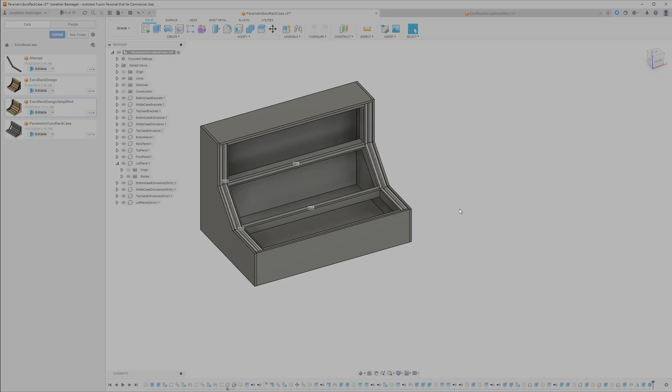So basically, let me show you how this works. Obviously I'm in Fusion 360. I'm not a master or anything at Fusion, I'm actually pretty new to it, but it was a fairly simple design, so it wasn't too bad. But I'll go through how this works.

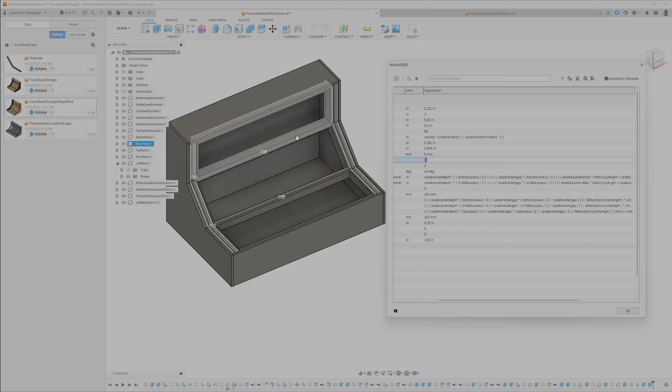So we've got a ton of different parameters here. It's kind of the most common thing you'll see is, okay, how many U's do you want on each section of the case? It's split into three sections - you've got the bottom, middle, and top. So you can customize each of those sections to your liking.

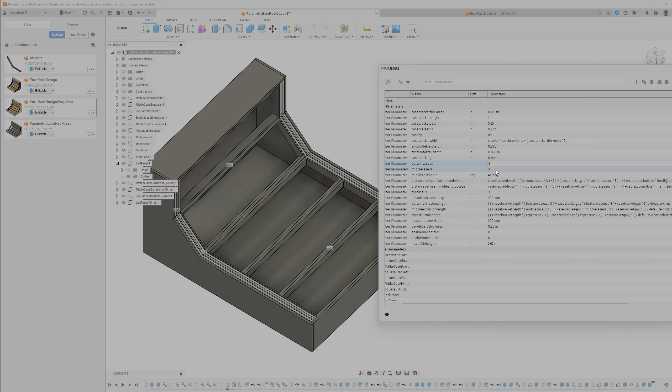For example, I can come here and change the bottom to, let's say, 9U, if it lets me. There we go, 9U, and you'll see now the bottom is 9U. These are still tiny, this looks weird, but yeah, you could do it if you totally want to. Let's do, for my case, I'm probably just going to go 6 on all of the sections.

So something like this. And then you can come in here and change your HP. I'm just going to make something up, let's say 200 HP, and you've got a really wide case there.

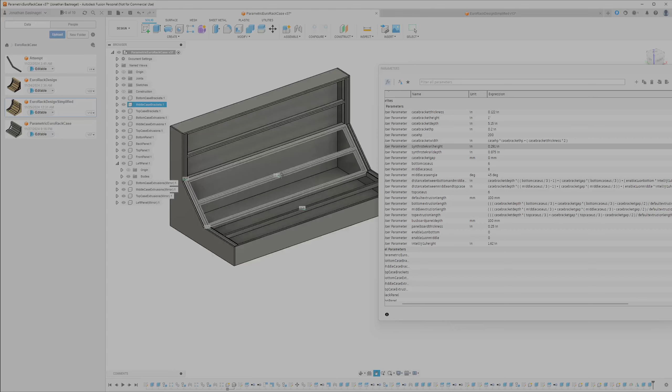You can also change things like - one of the requested things was having a gap between these brackets, for two, actually I guess three, different reasons. One was being able to route wires permanently, so people wanted to be able to route wires and hide them behind, then connect them in a permanent way, and keep those out of the way. The other was cooling.

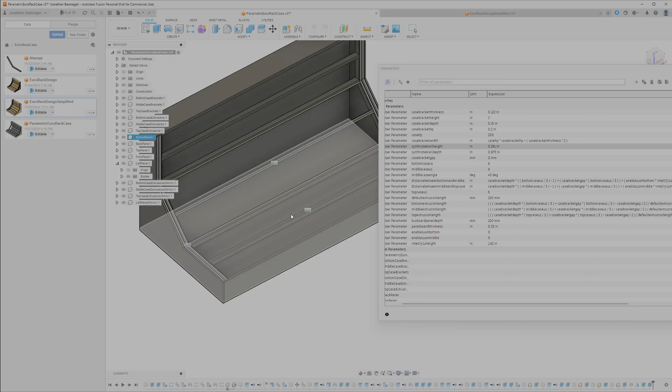To let air naturally flow, so it's not all the modules just cooking behind there. The third reason was someone mentioned that at these 45-degree angles it's kind of hard to connect between modules, so adding a gap there can help. So you can actually change the gap, so to speak - I call it a case bracket gap. If I do 10 mil here, you'll see there's 10 mil between each of them.

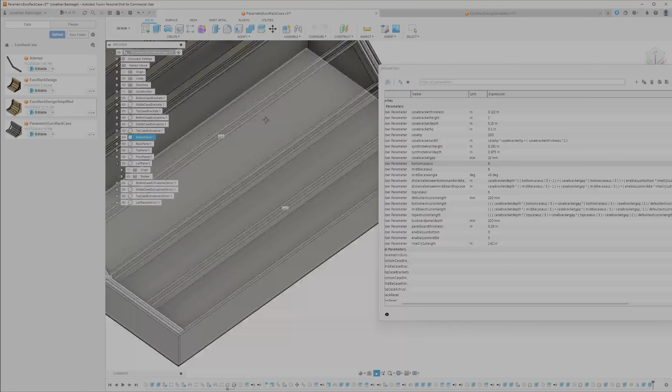Pretty cool. Then another thing you can do is change the depth between basically the top and the bottom. You can think of the top as just like where your modules would mount to. So from here to down here is 100 mil right now, and that's customizable. If you want a deeper case, you can say, hey, I want 200 millimeters. Oh well, maybe that's too high.

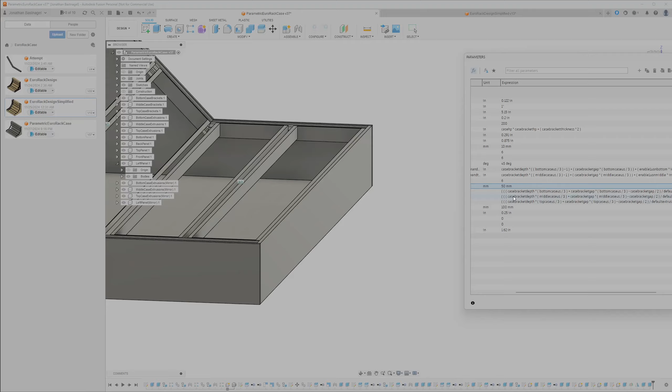I gotta fix that. But yeah, you can change this - let's actually make it smaller, right, 50 mil. Oh, I broke it. Did I break it? I think I broke it. Oh wait, I changed the wrong thing - oh, that's the extrusion length. Sorry, wrong thing, that'll break things.

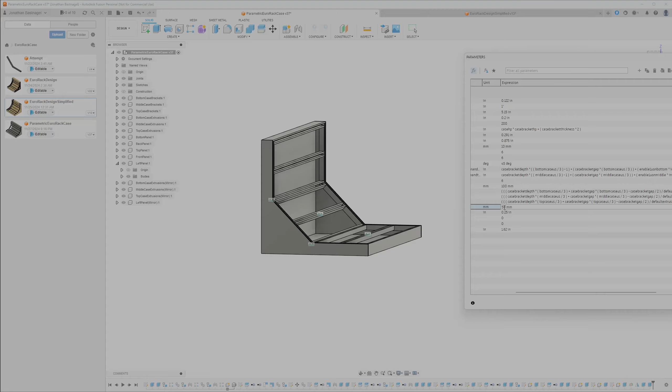Yeah, so if I do 50 mil here, you'll see it gets shallower. If I do 200 mil, it gets real deep. So yeah, you can do whatever you want there. And I'm going to have a false bottom here - it's just not modeled right now, it's still something I need to work on. But the false bottom will also have the same depth, and that's just so that all the...

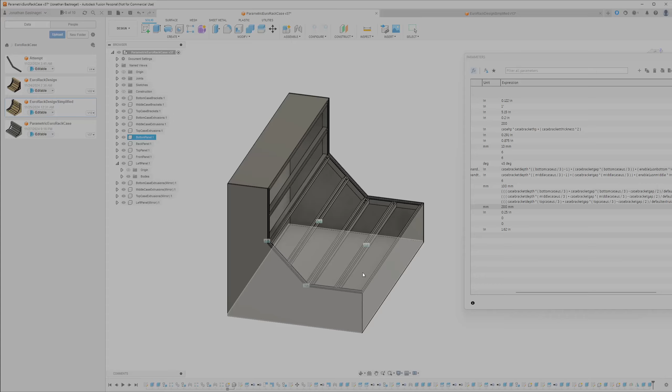Damn it, what are they called? Power boards, I forget the name of them, I don't know, I'm drawing a blank. Anyways, between all of these cases, they'll have 100 mil, or whatever you define, as your bus board. It's right there, yeah.

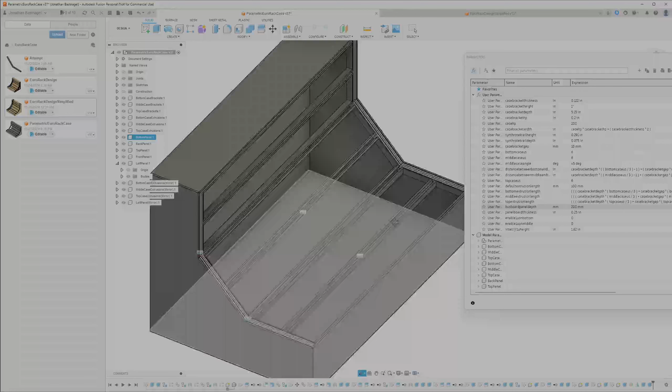So the distance between the top and the board that your bus board's mounted on will be the same across all of them, so it should be nice and neat.

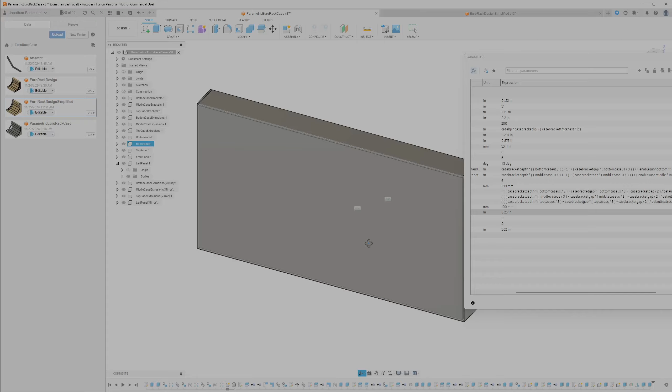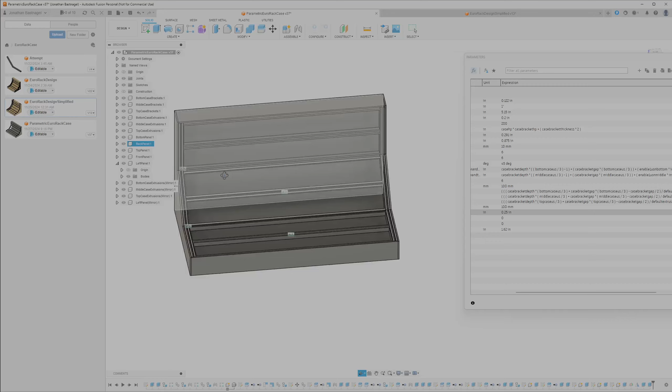You can also customize the thickness of these panels on the bottom, top, and sides. Right now they're all 1/4 inch because I figured a lot of people would do plywood, but you could also do acrylic or whatever. The only thing to note is the side panels are important for reducing shift - this could shift side to side if you don't have the panels on, so you do want those on.

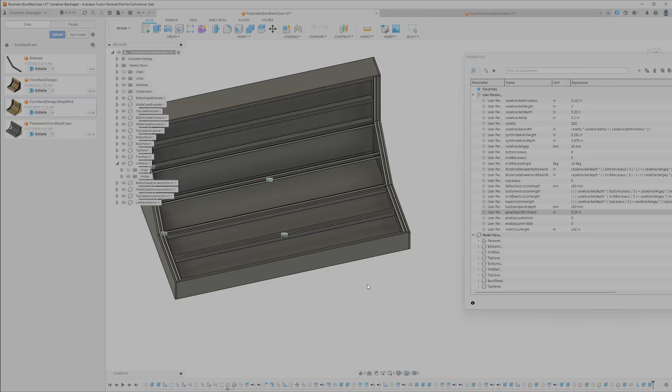And then the last thing people asked for was a way to have 1U modules. Right now I only support having it on the bottom and then in the middle. Let me turn off the case bracket gap so it's easier to visualize, so these are all flush with each other.

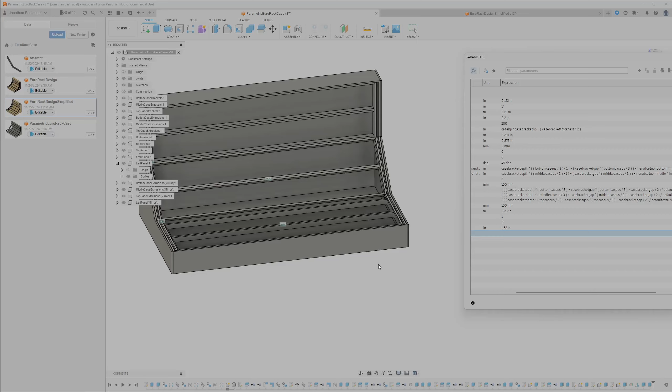And if I go and enable 1U on the bottom, you'll see there's a gap here to support Intellijel or IntelliJ, however you say it, format. And you can do the same on the top, or on the middle rather.

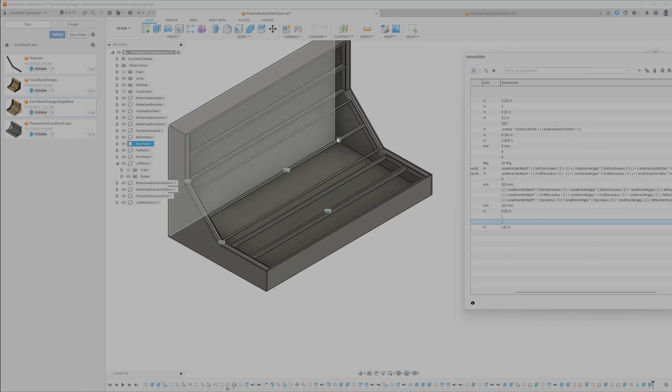I can add one on the top as well, it's not a big deal. But this is where you can currently add them - just on the top of the bottom and the top of the middle section. Eventually I'm going to have one on the top of the top section.

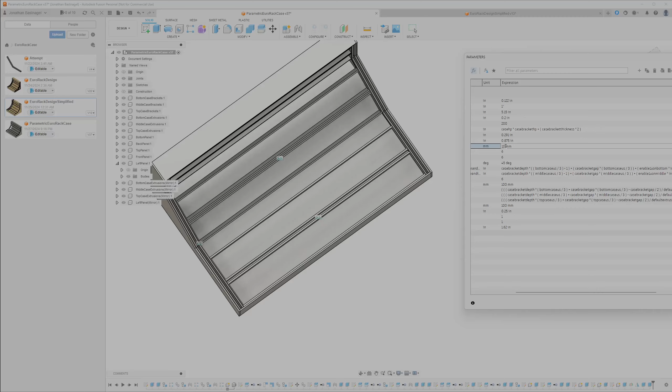And obviously if you add in a gap, it'll factor that in as well. So if I do this, it's going to add a gap between the 1Us as well. So that's factored in.

I know it doesn't show it in this example, but if you want, for example, to move this 1U down here, there's nothing stopping you when you actually build the design. It's just the way it's illustrated here is simply having a 1U. What I'm probably going to do is just allow you to specify how many 1Us you want per section.

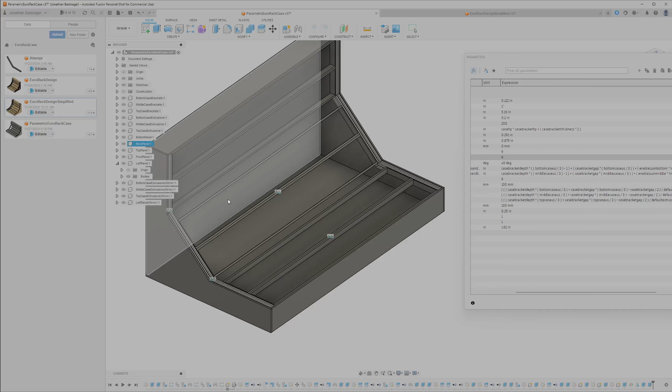So if you want 2 in the middle, it'll just have a gap that's twice as tall, but there's nothing stopping you from moving these brackets such that you have one up here and one in the middle between these, or maybe one on the bottom. However you want to do it, it doesn't matter - it's the same dimensions, so you can just order them however you want. That'll be something I add in, like a multiplier of how many 1Us you want in your case.

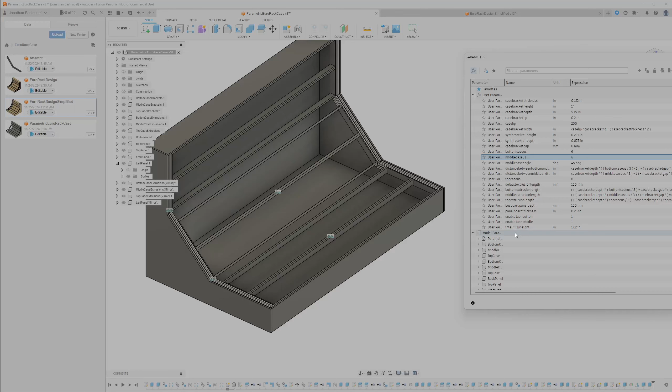So that's all the features right now. A couple things I mentioned that I'm going to add is basically adjustable height on the back that allows you to add a gap on this panel on the top and bottom just to allow air to flow through, as well as something to do with lighting.

I don't know what that's going to look like yet. I don't want it to be too intrusive. I want to avoid the amount - I mean, I know it's weird, but this thing's made of aluminum extrusions, and then whatever other material you want for the panels.

But I don't really want these to be the focal point of the case. I don't want the aluminum extrusions to take away from the rest of the case, so I'm trying to kind of hide them with the panels. But I don't know in terms of design how lighting would fit in too well, because I could just put an aluminum extrusion here and mount some lighting on it. That would be simple enough, but then that's going to kind of show. So I don't know, it's something I'm thinking about.

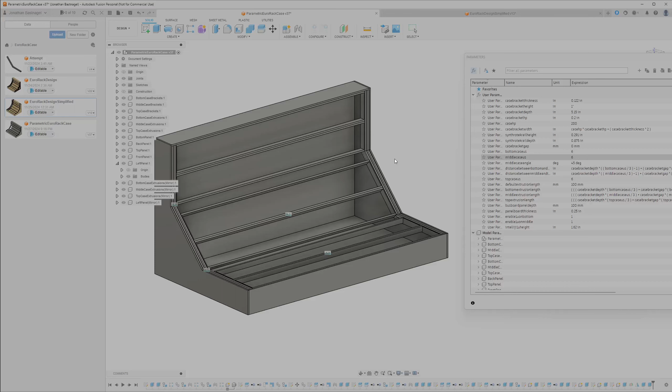By popular demand, I think the 1U and case bracket gap was the biggest thing people were asking for. Now, one thing people did want was to be able to change the angle here. Now I can do that.

However, the fasteners are tricky because you have to somehow join these two extrusions together. If we look at an older version of my design, this is kind of the predecessor to the parametric one—this one's not parametric. I did all this manually, so it's a fixed angle, you can't change any of the parameters on this one. That's why I ended up redoing it.

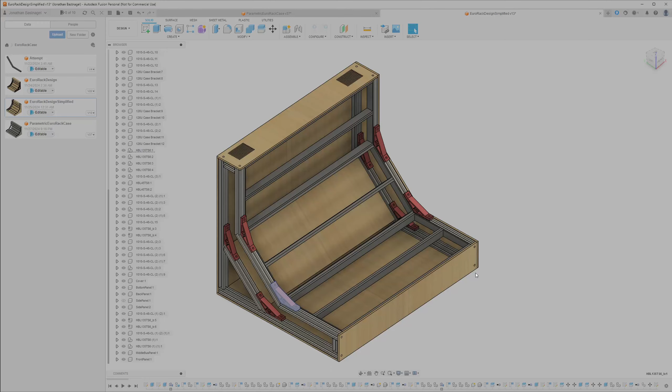But I have these fasteners here that join these two extrusions together, and these are easy to find. Those are fine if you're trying to do a 45-degree angle, but for any other angle you're not really going to find a whole lot, unless it's like a 90-degree fastener.

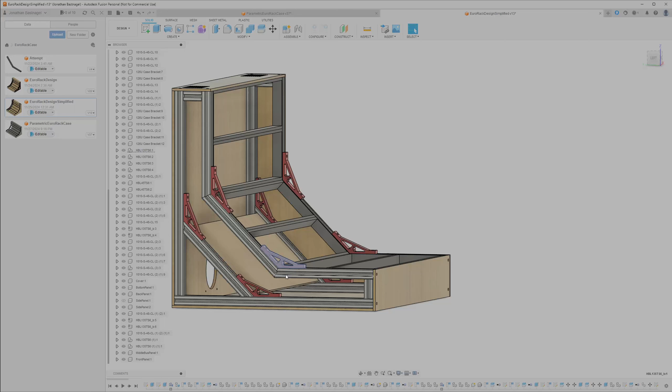80/20 does sell a custom one, called a miter fastener, which basically goes through the middle—there's a part that goes in the middle, and another part that goes in on the inside. But the problem is it requires significant modification to the extrusion itself. They have to actually tap a hole and use an end mill and more complicated tooling than most people would have access to.

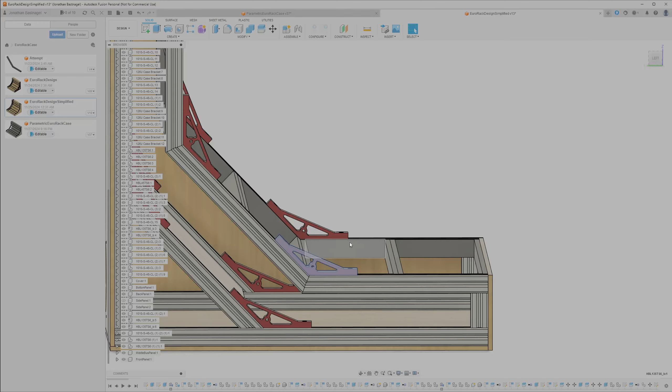I'm trying to make this as easy to do as possible. That said, I think it's still technically possible, and the idea I'm toying with, which I haven't implemented yet, is providing a 3D printable fastener that connects on the T-slots.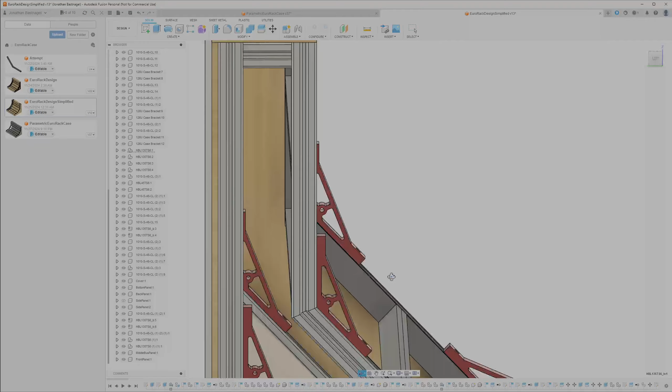So in this case with the 45-degree angle, there would be a 3D printed part that sits in both T-slots and mounts to T-nuts on the back of it. You'd do this on the bottom and the top. You couldn't really do it on this side—it depends on how these are fastened, so you may be able to avoid interference, but for now it'd be on the top, bottom, and side. You'd have this custom 3D printed fastener to join the extrusions together. That's a potential workaround.

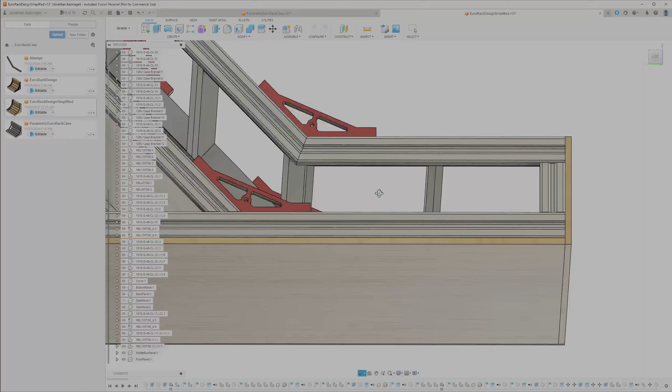Now, I don't know how strong that's going to be. This is metal—these are aluminum and pretty thick. I'd probably print in ABS as an example. I would not do PLA, particularly because PLA has a tendency to warp under any sort of heat, and especially on the bottom here where there's a lot of case heat, that could warp, and that's no good.

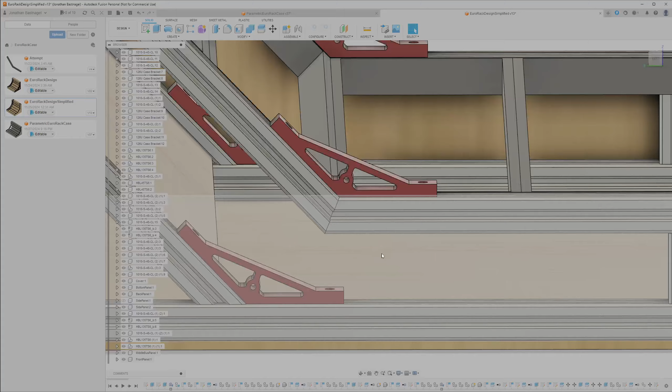I actually had that happen on my 3D printer when I built my Voron a few years ago. I had to print in PLA temporarily to house an electrical mount that goes on DIN rails on the bottom, and that thing warped within a few hours of printing. So the first few things I printed to replace it were in ABS. So I wouldn't do PLA—ABS is probably fine, I just don't know how rigid and strong it would be. But that's one idea I have.

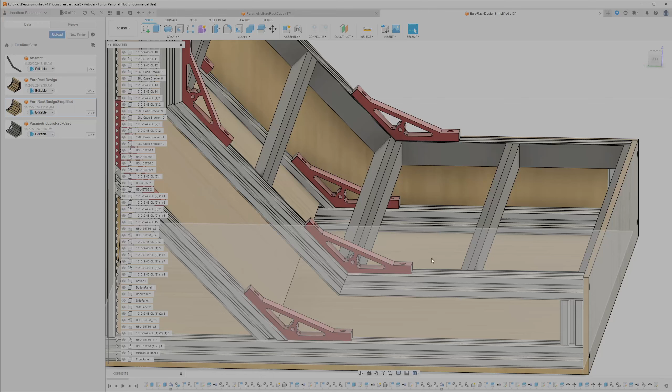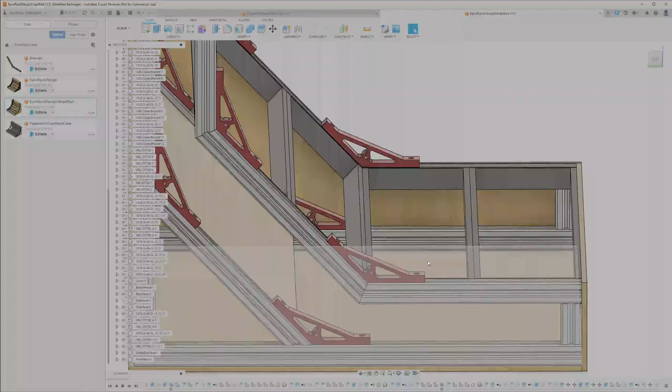Now, these I wouldn't be able to mount that way, because except for the top part, you'd only really be able to mount it on this angle right here. So that is a problem. There are some design quirks still to figure out, but I'll try to factor in letting you put in your own angle between these, and maybe that makes it a little more customizable for y'all.